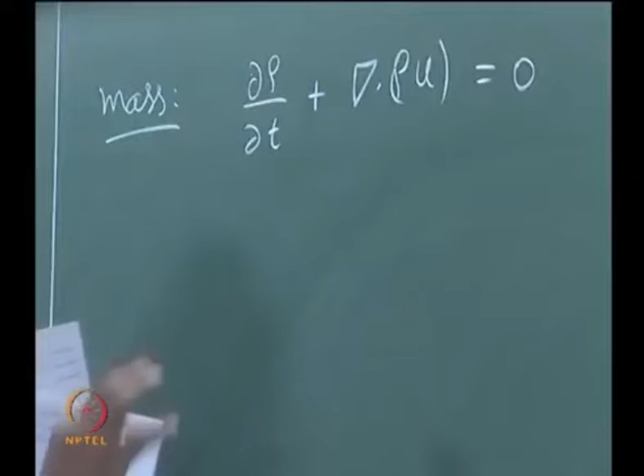This still remains the same, except I will write it in one more form, where this can be clubbed together as the total derivative. This is fluid mechanics, so I will avoid going into much detail of the total derivative. We will be using it in derivation because it makes our life simpler and decreases the number of terms we write.

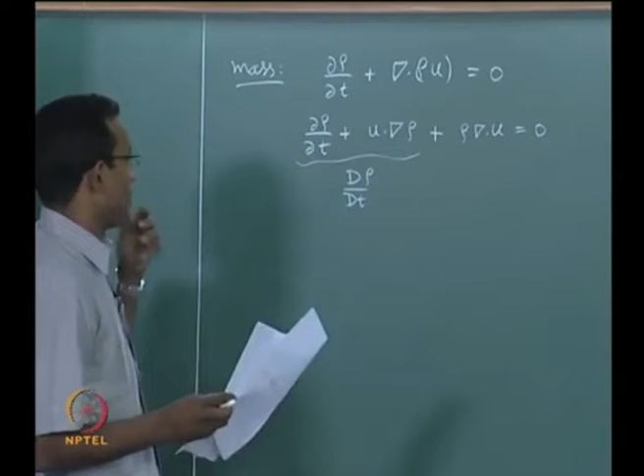So it can be written in this form also. If we say the flow is incompressible, meaning density does not change at all, this term goes to 0, and that is how we get to incompressible flow with divergence equal to 0. But we are not in the incompressible world, we are very much in the compressible world, so this need not be 0.

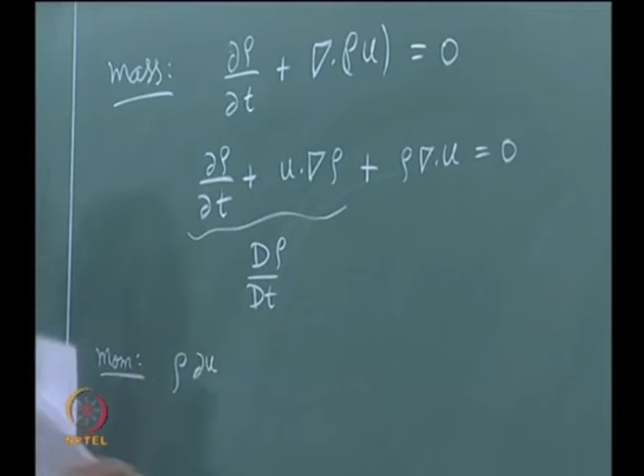Next is momentum conservation, where we got an expression. This is all referring to around the 5th or 6th lecture, somewhere at the beginning, where we derived all the equations of motion. I will put this arrow for vector u everywhere.

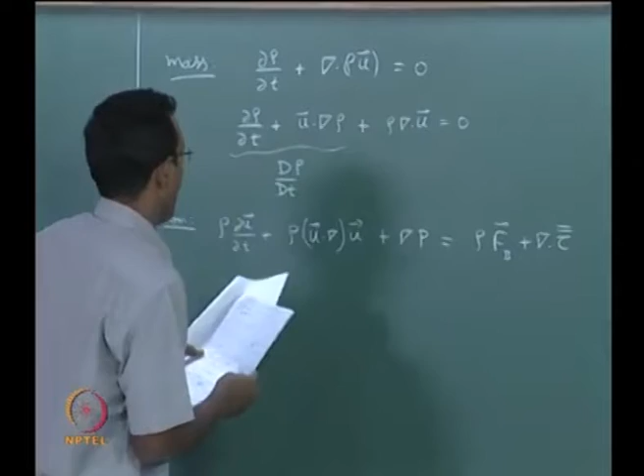I have written these extra terms now, which we said were 0 the previous time when we derived this. I have just added these two terms. This is telling you the total momentum conservation. The very first time we derived it, we had this term as d by dt of rho u inside the derivative, and I used this expression inside that to simplify it to this form. I will not go into details since it's fluid mechanics; when you derive the equation for the first time it comes out that way, so we will keep only this form.

Previously when deriving, we said we do not have any body forces, so we set this equal to 0, and we said we do not have any viscosity, so every term in the shear force, which has a mu inside it, was said to be 0, so we neglected this term. Now we do not want to neglect it, we will just keep it as is. So basically this becomes our momentum equation.

Next is energy. I will write what we had before, and then from there we will add two more terms similar to this.

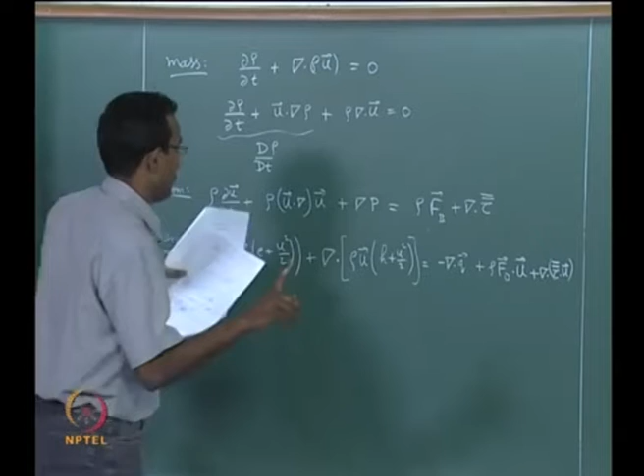One more thing I need to tell you is that FB is body force per unit mass, roughly an acceleration term. FB is body force per unit mass, but everything else is on a per unit volume basis, so I am multiplying by density to get to the per unit volume basis. That is how we got to this form.

Now I want to rearrange this energy equation so we can get more information out of it. What it is telling us is not very clear if I write it like this. This is perfectly correct, but it does not give full information. We will try and rearrange the terms here. I will take the left hand side of the equation and expand it, where I will say H is E plus P by rho, and see what I am getting.

I will do one more thing. I will use differentiation by parts so that I can cut down one step here. I am taking rho as one quantity and this bracket as another quantity, and taking the derivative by parts from here.

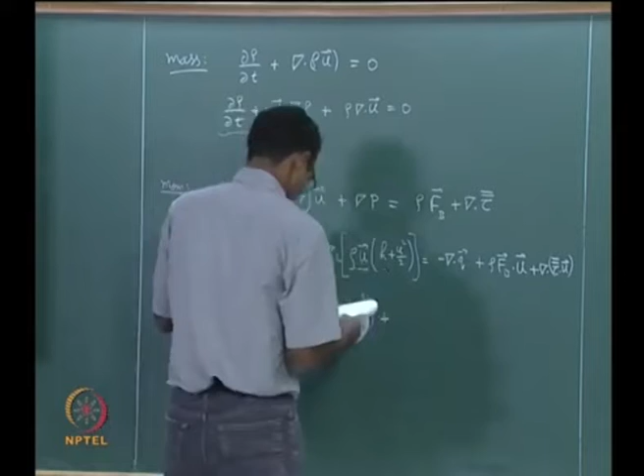This is coming from the first term alone plus the next term. Again we have to do a similar thing. I am going to group rho u together and keep the bracket as another term. If I keep the rho u term together, I am going to have...

Ideally I should have del dot of h plus u square by 2, which I want to write here as E plus P by rho. I will put h as E plus P by rho, take this E plus u square by 2 together and write it here. We will remember that there is one P by rho term left out inside this whole equation.

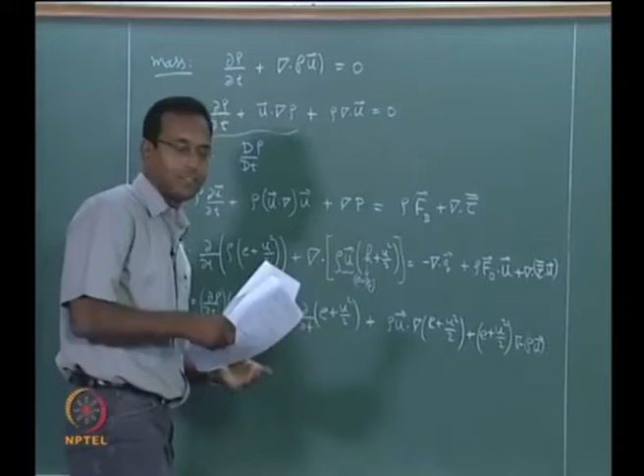This is one term plus the other term where derivative is on rho u, del dot of rho u. Now we will remember that there is a term del dot of rho u times P by rho which is left, which I will write separately, plus del dot of...

We will just keep it like this. I know I can cancel the density, we will do that later. Now I will look at this expression. I want to simplify it a little bit.

I will keep the terms with E plus u square by 2 as a common factor together. If I look at that, that will be this term and this term. If I take this common factor out, what is remaining is dou rho by dou t plus del dot of rho u, which happens to be equal to 0 from the mass equation.

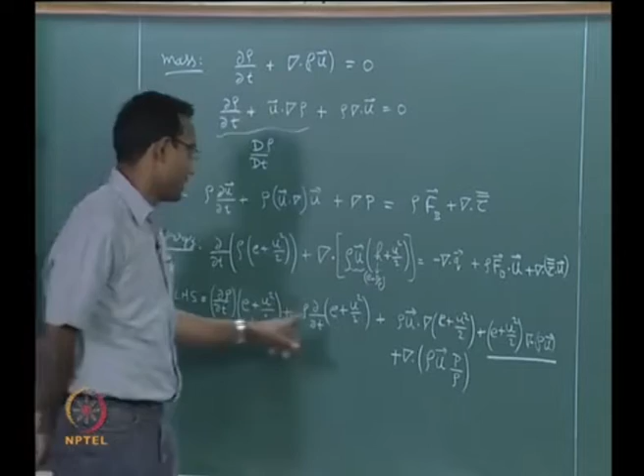So I will just remove those two terms from there. My left hand side is only these three terms. I will continue from there. By the way, that is the same exercise we did for getting the momentum equation from the previously derived form to the present form.

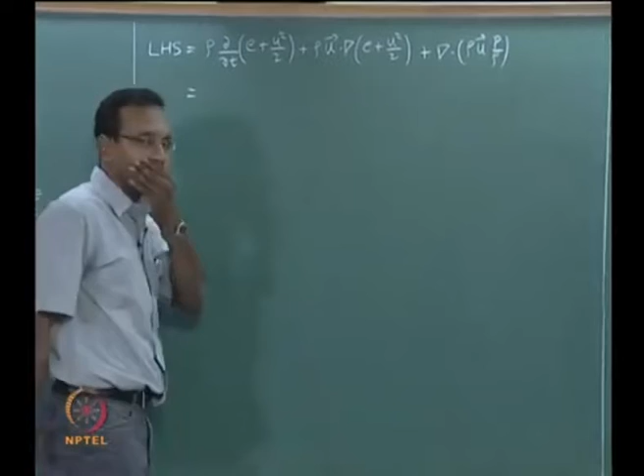Now I will rewrite this again. I want to get to a point where I will reach H naught, the stagnation enthalpy. So I will rearrange this now that it is in a better form, such that it will be H instead of E in both places, so I can write this whole thing as a total derivative. I will directly write it as H plus U square by 2. We will figure out what is missing after this.

Now we will put all the missing terms. I added a P by rho here, so that will come as the next term sitting there, minus rho into dou by dou t of p by rho. I will put a plus inside here, plus u dot del of p by rho, plus the final term there, del dot. Since I do not have space, I will cancel the density and write it there.

Okay, I have these terms here. Now I can club these two terms together and write it as rho into total derivative of H naught. These two terms come together to form this one term, minus the remaining terms.

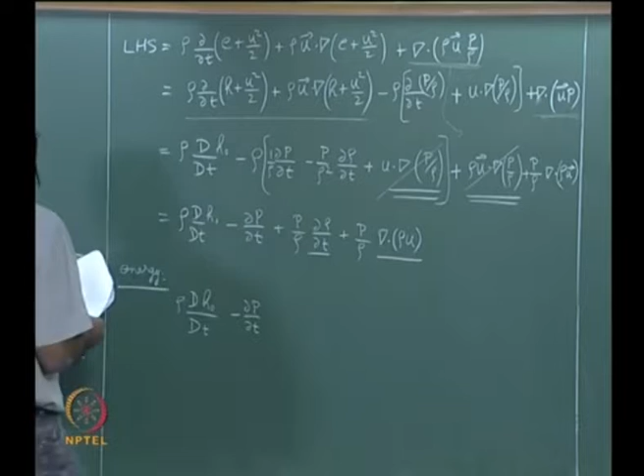Now I will bring all the other terms and write it together. My full energy equation will now be rho d H naught by dt. Now I want to write it with this on the other side, so I will put it as rho dH naught by dt, I have taken the dou p by dou t to the other side, and I have the remaining terms.

I will write it as plus rho fb vector dotted with u, plus del dot of tau tensor dotted with u vector. There is one more term, minus del dot of q.

Okay, I finally have this particular form. We won't do any more changes to this. This gives you some more physical feeling. All this time we said total enthalpy is the net energy content of the fluid. This includes kinetic energy as well as internal energy, thermal energy including the pressure energy. It is having all forms of energy, thermal energy, pressure energy and kinetic energy. Complete set is inside this. So this is the net content of energy in that particular fluid element.

Now we want to see the change in that particular quantity. If I look at it, it may change, the simplest term is this one: if I call del dot q the divergence of heat, this is heat conduction, heat flux q is basically talking about divergence of heat away from this point. So if there is divergence of heat away from this point, that is going to have energy loss, so it is negative. Or you can think about minus of divergence as the convergence of heat, opposite of divergence, converging heat into that point, that is increasing energy, whichever way you think about it. That is one term.

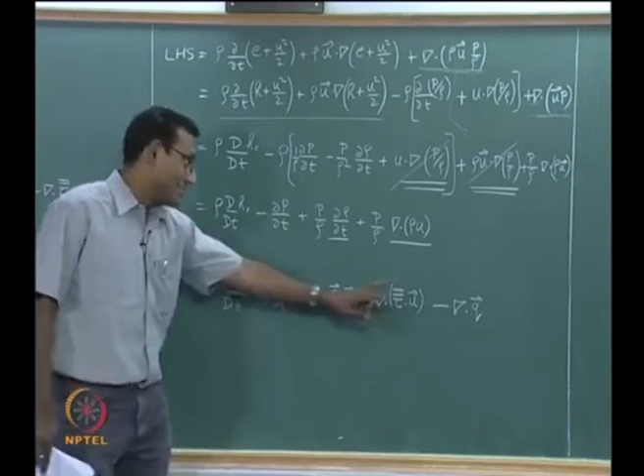And finally, there is one more term here which is talking about if I suddenly have an unsteady pressure rise, that can also add energy to my fluid. Where have we seen this? We have seen one example where we said there is no heat transfer, no body force, no shear, but we have a moving shock. When the shock crosses my current point of interest, I am going to have pressure rising. When the pressure rises, I am going to have T naught increasing, that is how it was, right. We found that when a moving shock crosses my point, T naught increases, that is directly coming from here.

These are the various mechanisms by which we may change energy of the fluid. Till now we have thought about only simple things; now we will go and look at a little more details of what all other things can change the net energy.

Of course, we will still neglect this body force term - you can add it, it is simple enough. We are going to think about heat transfer and viscous forces, but we will not deal with this complicated viscous force term. I will not explain what this tau tensor is really, I am just going around it since it is not important for this course, because we are going to work in one dimension, where it comes out much simpler. If I send an expansion wave, what happens?

This will automatically become negative, pressure is going to drop, and that will automatically pull out energy from the system. That can also happen. If there is a moving expansion, it is going to cool down the gas, it is going to pull out net energy from the gas also. Any of these can be happening in there.

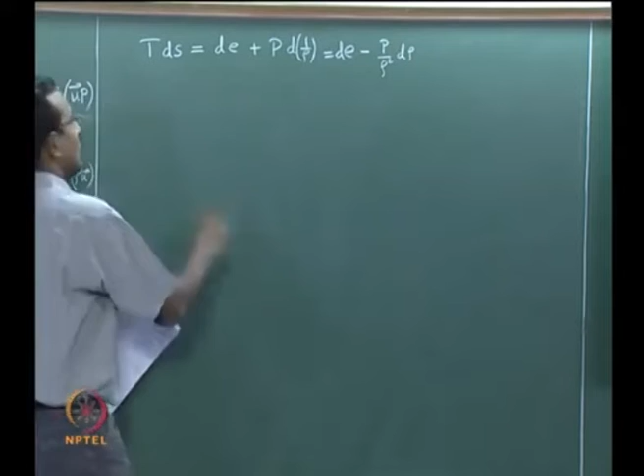Now, we will use this particular definition and we want to write ds by dt, the total derivative of entropy, the net entropy change in my fluid element. If I write that using this derivative notation, I can immediately jump to this derivative: dE by dt minus p by rho square, d rho by dt.

Now, I look at this minus d rho by dt. I will use my continuity equation which is out here - this is why I wrote d rho by dt. If I put a minus sign, it is equivalent to taking this part to the other side of the equation, so it comes out to be rho times del dot u. I will use that in there, so I simplify this to dE by dt plus p by rho square into rho del dot u. One rho gets cancelled there. I have this particular form here.

Now, I need to write dE by dt, which is just talking about the internal energy of the fluid, not the total enthalpy which is what we have been writing till now. So now I need to split this total enthalpy from my full energy equation. For this, I have to think about what are the components of my energy equation. I have my enthalpy plus kinetic energy as my total energy equation, where enthalpy is internal energy plus p by rho.

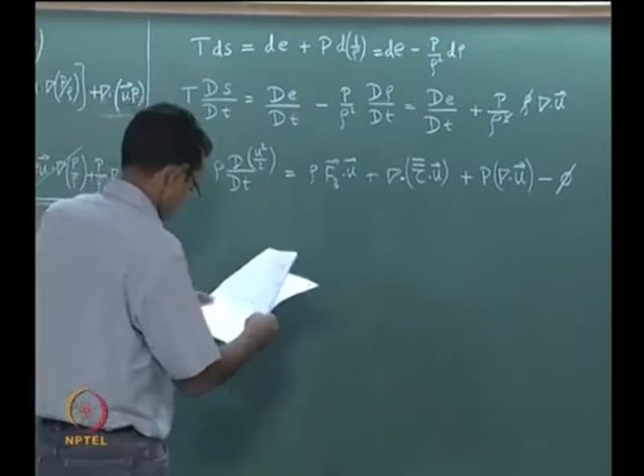So if I subtract this from our original energy equation which we had before, it comes to a point where I can write rho dE by dt is equal to minus del dot q minus p times del dot u plus phi. Only these will be remaining. You will find that the viscous work is going to be internal and it will just sit in the total energy also. So only thing remaining is this particular part.

What we are now seeing is this is only the thermal part of the energy. When we look at the thermal part, we find that if there is net convergence of heat into the fluid element, then it increases. If there is net contraction of the fluid element, del dot U is related to the rate of expansion of the fluid element, and minus of that is like compression of the fluid element, that is external work done on the fluid that can cause heating, and this is the energy added from kinetic energy to thermal energy due to viscous effects.

If you look at this previous equation and this equation, in the kinetic energy equation there is a minus phi, I did not write the term, but it is going to be negative, pulling out energy from kinetic energy, and here it is plus phi, adding that energy into the thermal energy.

If you look at the total energy equation which we had before, I will go back to it once more, that is this one, we find that there is no phi in this particular thing. Why? It is just an internal rearrangement, taking from one pocket and putting it into the other, so it is not there at all. This is the net energy, overall how much do I contain, that kind of thing is this one.

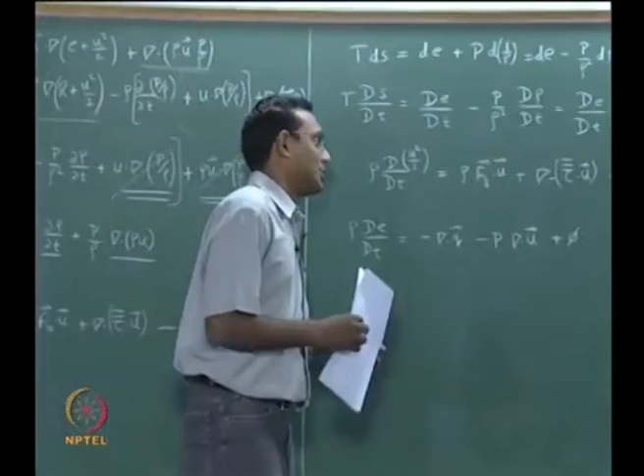So this is my internal energy equation. Now I want to put this dE by dt inside here, and I have a rho here, we will multiply this entropy equation with rho, so that I will get rho dE by dt. So I am going to finally have a form: rho into temperature ds by dt is equal to, I will put rho into dE by dt, instead of that I will write this expression which will be minus del dot q minus p into del dot u plus phi. I have this particular term, now I will write this particular thing, p by rho times del dot u.

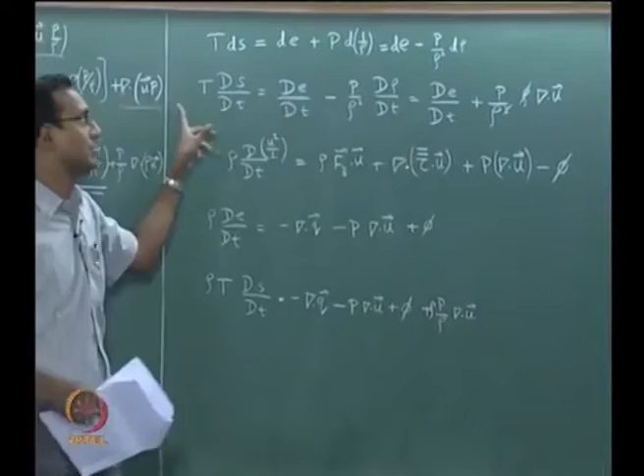This is my net entropy equation. What is that? Oh, the last term should have a multiplied by rho also, because I multiplied the whole expression with rho. While rho dE by dt was this term, that one should also be multiplied by rho, so the p and rho will get cancelled. So I have this term. Now you will find that this term and this term get cancelled.

So, I am finding that for my entropy to increase, it has to be through convergence of heat into the fluid element or through frictional heating of the fluid element. These are the two modes where I can have entropy increase in my fluid flow.

Up to this point I have always used compressible flow, density was changing. It so happens that I used my continuity equation, so the density always comes out of my derivatives, but I know that it is compressible flow.

So the essential part of this statement is that if I do not have heating of my fluid, either by heat conduction or by viscous forces, I will not have any entropy change in my fluid flow. These are my predominant changes in entropy. Entropy changes are mainly due to this.

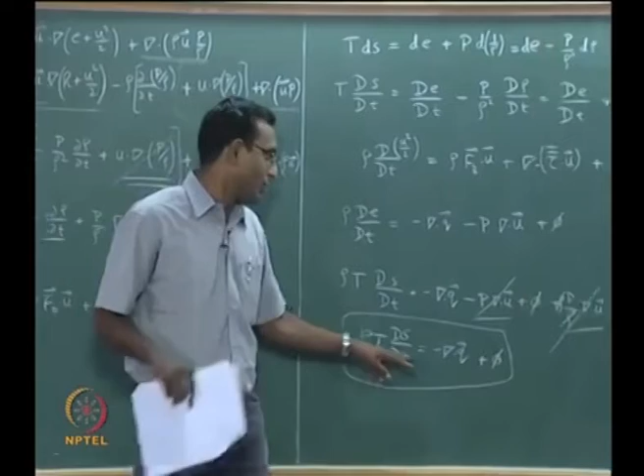Of course, we also know there is one more way we can change entropy, that is through shocks in the flow, which is just sitting inside this, which we could not talk about here. That will come as delta P naught, that will not be from here, that should come from the direct expansion of this term.

If I expand it, we did this long back, I don't know where I have that expression right now, but we found that delta S by R was equal to log of T naught 2 by T naught 1 to the power gamma by gamma minus 1, multiplied by P naught 1 by P naught 2. We had one such expression.

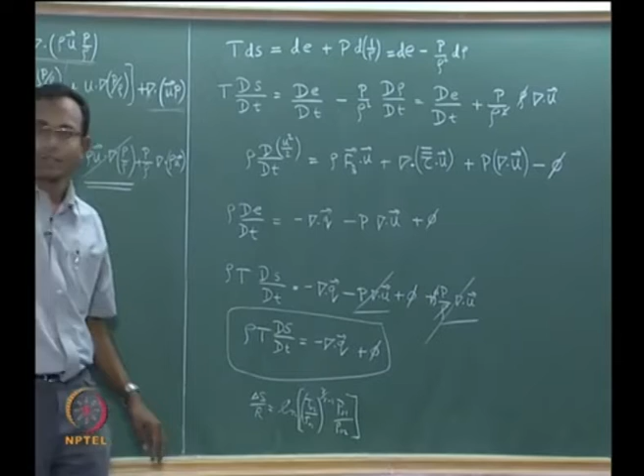This is going to take care of that fluid mechanical way of increasing entropy. This is one more form of writing it, actually derived from the top equation. We won't go into the details of that right now, it was done, I believe, just after the moving shocks discussion.

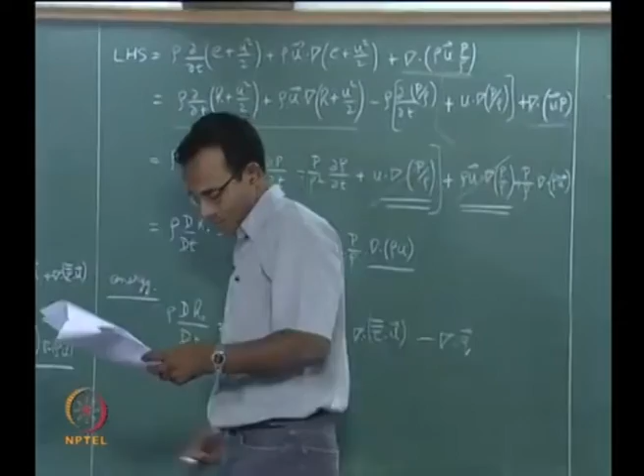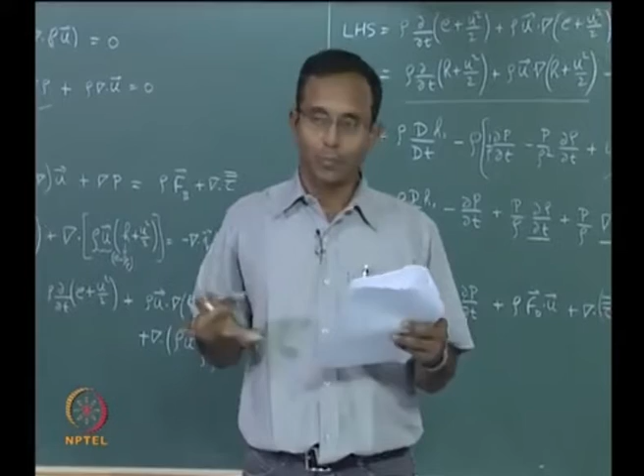So we want to look at those two particular characteristics, that is, heating of the fluid element or viscous forces causing entropy change. We are going to deal with two types of flow fields now where entropy change is important. First one we will pick up friction flow, next one we will pick heating.

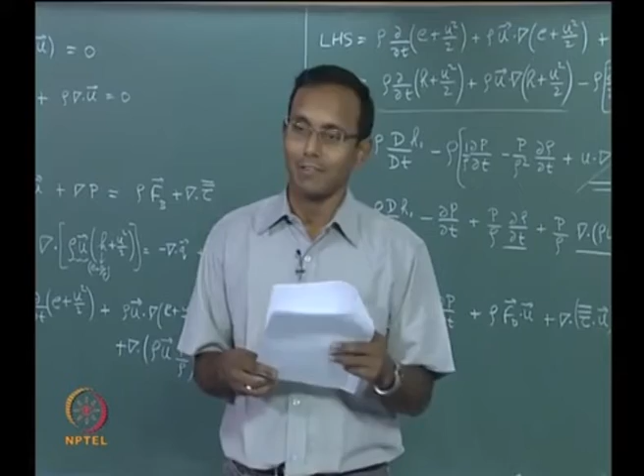But before that, I just wanted to give this small snippet of analytical work by an Italian engineer called Crocco. It is a nice point to give it here. It has to be given so that you will understand the connection between vorticity and entropy. Since we are anyway deriving gradients of entropy in my flow, it is a good point to give it at this point.

We will derive it the simplest way first, then we will give you the most complicated expression, that is the final result. It is also going to introduce you to the streamwise coordinate system.

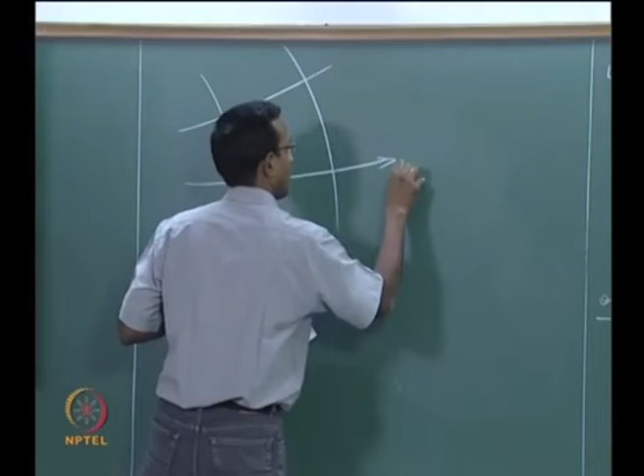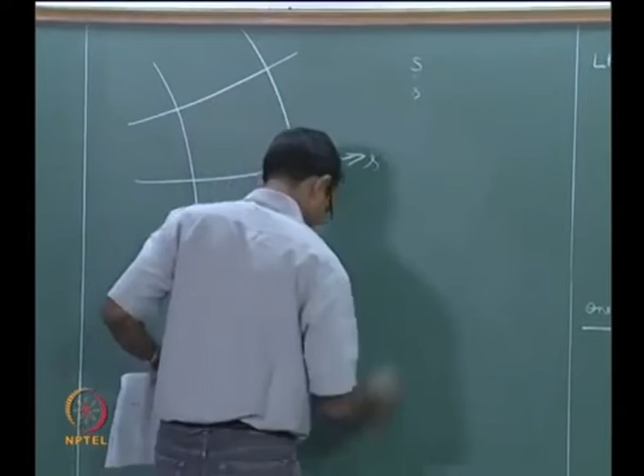I am calling this my streamline. I am using this kind of S, small s, while if I use the other S, this is entropy per mass. This is my streamwise distance coordinate system. So I am having this as S, let us say this is my reference point I am picking, this is my n, the normal, stream normal coordinate system.

So I will say that if this is my point n comma s, there is going to be a delta n there. This point will be n, s plus delta s. While here it will be n plus delta n, this will be n plus delta n, s plus delta s, that kind of coordinate system I am going to have.

Now let us say I have some particular velocity direction with respect to my previous original rectilinear coordinate system. Let us say this is having a theta with respect to xy coordinate system, that is my velocity vector.

If that is the case, then when I go from here to the next n point, the velocity vector will be parallel to that local streamline, which is this line, another S curve, and that angle is going to be theta plus dou theta by dou n times delta n, just a generalized form of writing it. For a small change in n, how much will be the change in theta is what this represents, and we will just keep it that way, very generalized form.

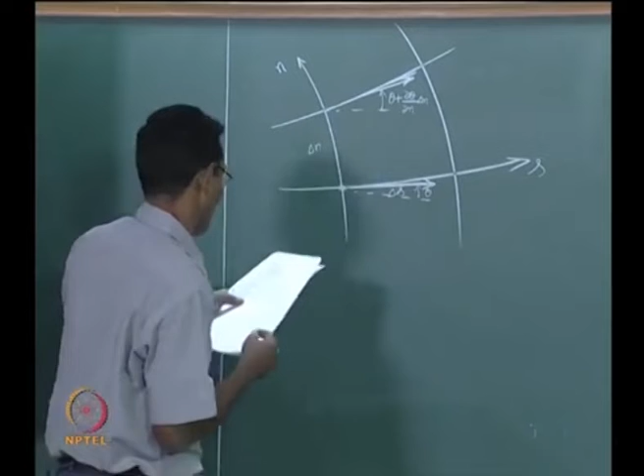And here this gap was delta s, I am going to say this is delta s plus dou by dou n of delta s times delta n.

Okay, the change in delta s with delta n is what is shown there, that is this point to this point, the gap is there. Just taking care of full details. Of course, we may not use all of them, and what will happen to velocity here, this velocity will be u, which is the value here, this is my velocity u.

It will become u plus dou u by dou n times delta n. This will be the velocity at this point.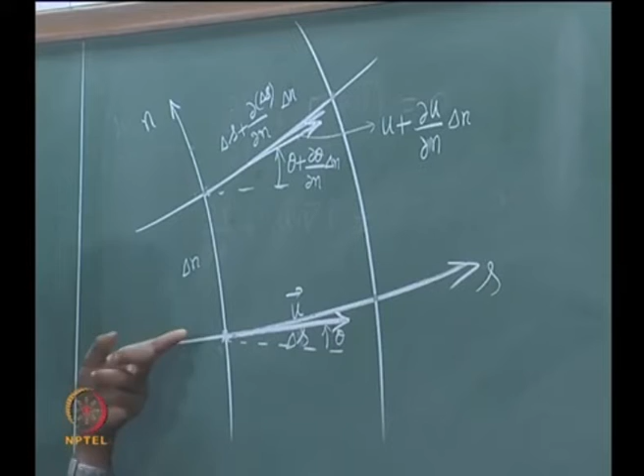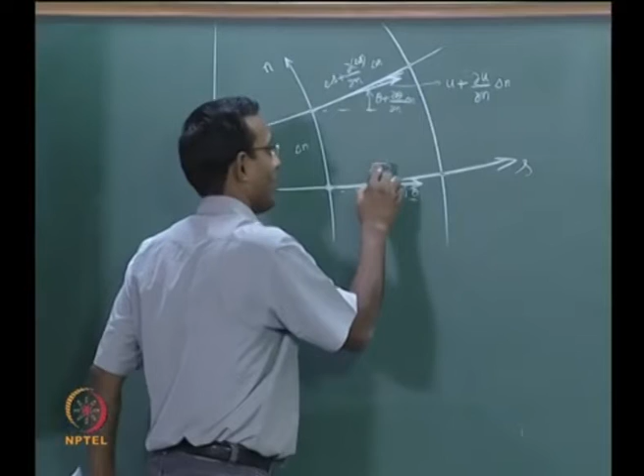Should I think about components of velocity? There is no components here because it is a streamwise coordinate system, which means all the velocity is going to be only along this S. There is no velocity component perpendicular to it because this is a streamline. So I can just talk about velocity always along this direction, there is no perpendicular component. So I have basically brought my problem down. I don't need to think about u as a vector, I will just think about u, and it looks as if it is a 1D problem finally.

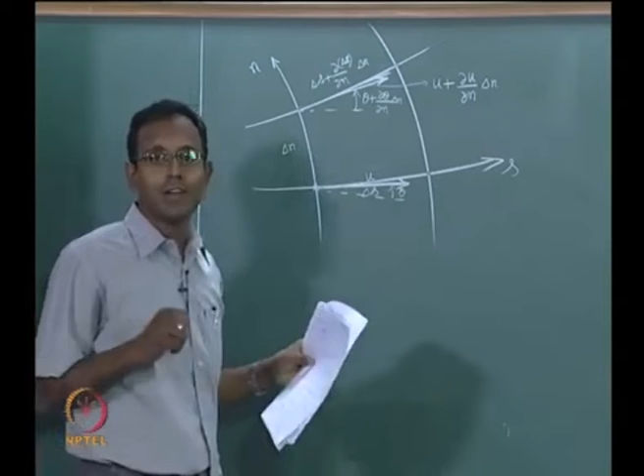Because it is going to be varying only inside the stream tube. Between any S and S plus delta S, n and n plus delta n, that particular thing is one set of stream tube, and my problem is 1D problem inside this, which means now I can use all the 1D equations. So we will write the 1D conservation equation for this.

Whatever we have used all the time, we will just write it here: rho u times delta n. This is supposed to be rho u A is constant. When I say delta n here, this delta n is this length and unit depth inside. I am thinking 2D problem, it is unit depth inside. So delta n times 1 is what is given as area here.

Similarly, momentum, now we have to be a little more careful, forces can act along this n direction also. So now I have to think about S momentum first, only along the S direction, S momentum equation, like we had x momentum and y momentum. So here it is S momentum equation.

Now it can be written as rho u dou u by dou S equal to minus dou p by dou S. If you look at this, this is your acceleration of your fluid element, inertial forces here, and that has to be compensated by the pressure force from here to here. The fluid is accelerating this way because I am going to say pressure here is higher than pressure here, so there is a dp by ds that is negative, and the net force acting will be minus of dp by ds times that area. I have divided by area throughout, that is this.

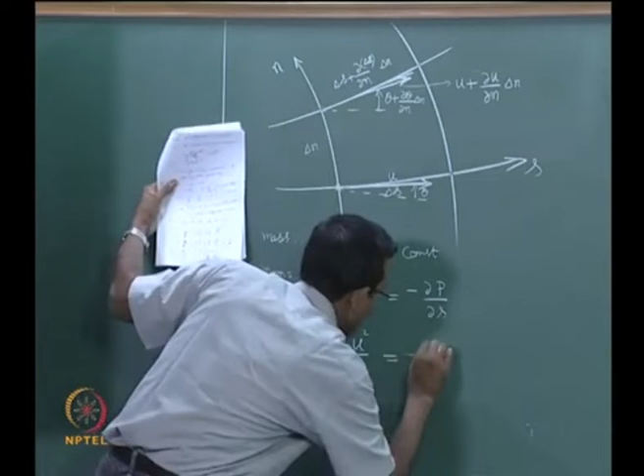So I will write an expression for that, that will be rho u square by r, this is your centripetal component, this should be given by minus of dou p by dou n. The normal force, if my pressure here is higher than pressure here, then my streamline will curve up. As the pressure goes from lower end to higher end, pressure decreases, which means my streamline will turn up, that is what this is showing here. Minus of dou p by dou n is the net force upward, that is going to cause a centripetal acceleration, that is this term sitting here.

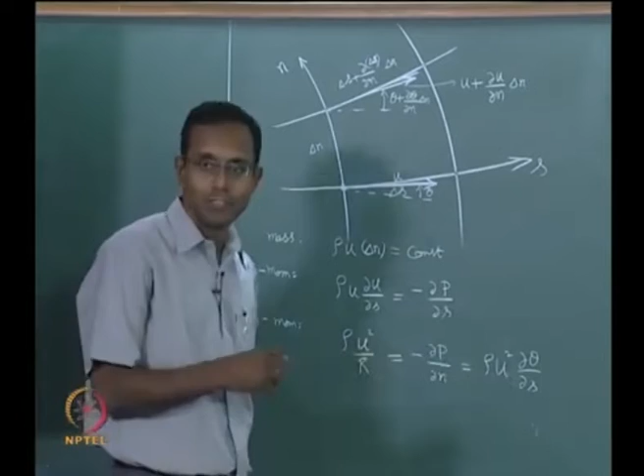Now I will just write, since we have this u square by r, r is your radius of curvature, I will write this in terms of theta, which we are given in the drawing. Rho u square into 1 by r can be represented as dou theta by dou s, that happens to be the curvature. 1 by r is given as curvature, which is equal to dou theta by dou s. How does theta vary as I go this way? That talks about the curvature of this particular curve S coordinate system.

Now the only other thing left is energy.

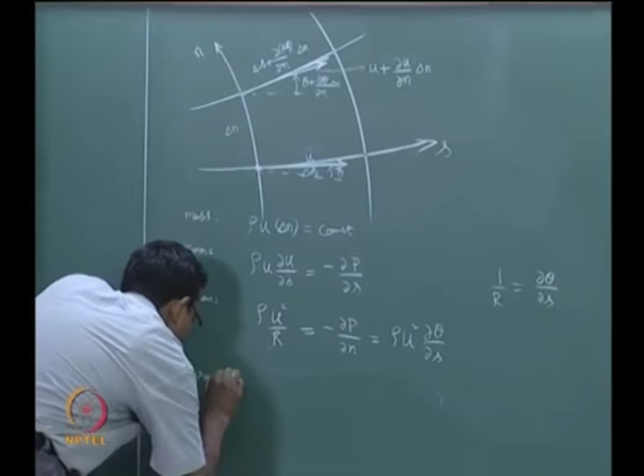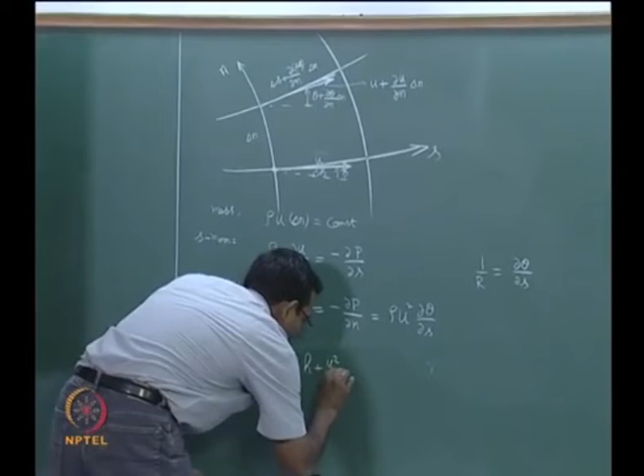We will write the simplified form where we say there is no heat transfer and no viscosity, just for this Crocco's theorem derivation alone. When we say that, we know H naught is constant. This is the old 1D derivation, I am just writing it again. In fact, in today's derivation also, when you set those terms equal to 0, you automatically get to this. I can introduce a non-stationary flow where pressure may change with time, getting a dou p by dou t term, but currently we will keep it simplified. When we give the generalized expression, I will give the full thing.

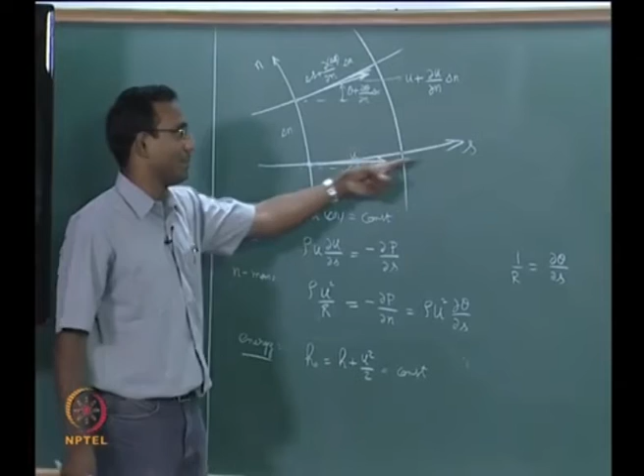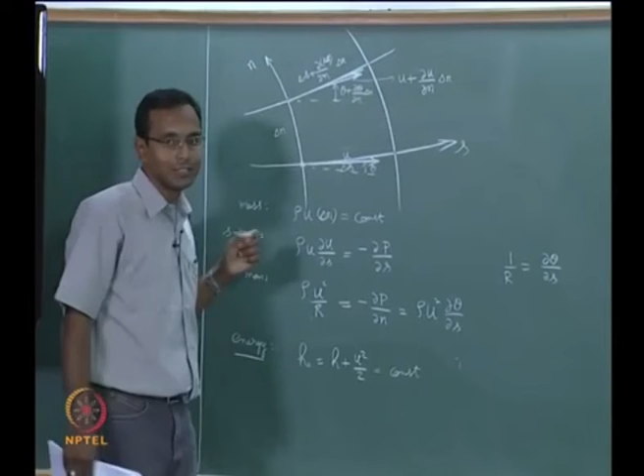One more thing: this tells us H naught is constant for every streamline S. It may so happen that this streamline has a different H naught from another streamline. I did not say H naught is constant for all S, only that it is constant along a particular S. In 1D gas dynamics, we just know that inside a stream tube H naught does not change, but it may change from one stream tube to the next.

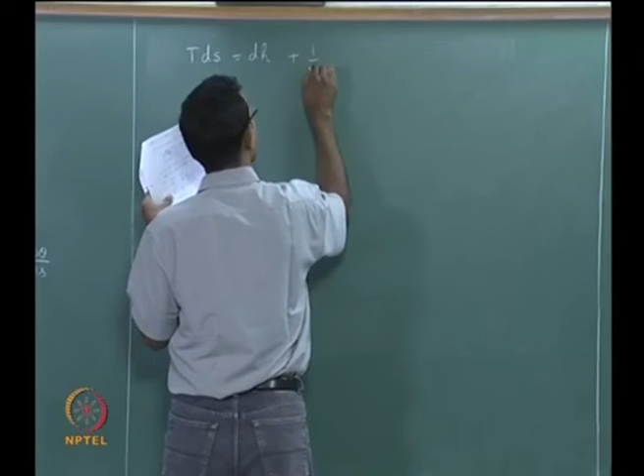So now I will write again the entropy relation, where S is entropy per unit mass. dH minus VdP, which can be expressed in terms of dH naught from the expression written there: dH naught minus U du will be your dH minus 1 by rho dP. I can write it like this.

From here I want to look at the individual variation of entropy along the S direction and N direction. This definition is for any particular change in S. Now I will make it change only in one particular direction: T dou S by dou s, the streamwise coordinate, is equal to dou H naught by dou S, which is 0 because that is constant, minus U dou U by dou S, minus 1 by rho dou P by dou S. This is what we get.

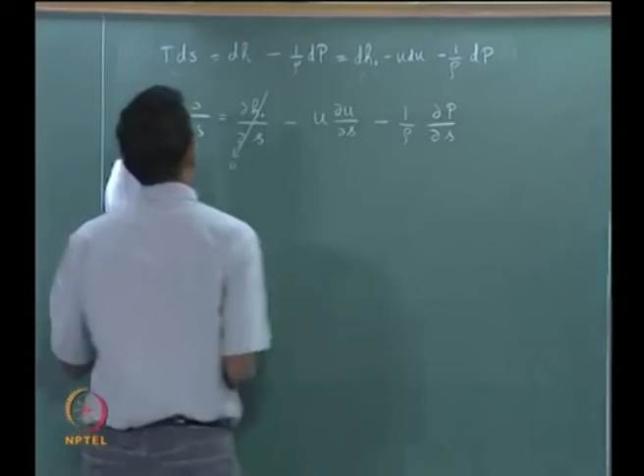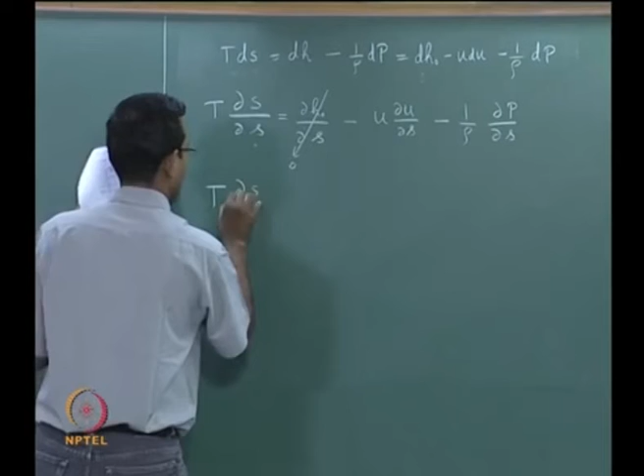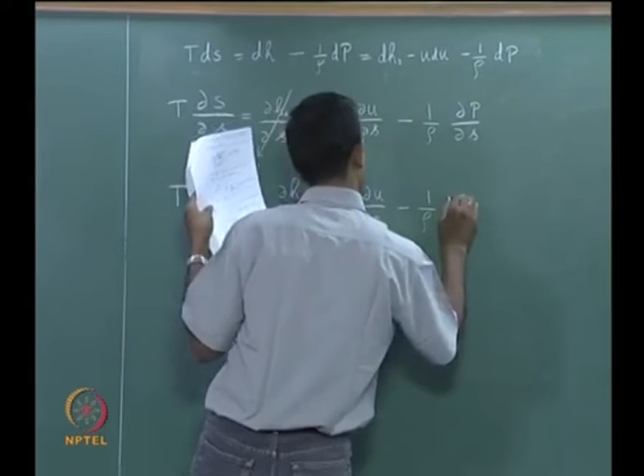And now I will write the other one, the stream normal direction: dou S by dou N is going to be equal to dou H naught by dou N minus U dou U by dou N minus 1 by rho dou P by dou N. I have these, now we go back to dou S by dou S.

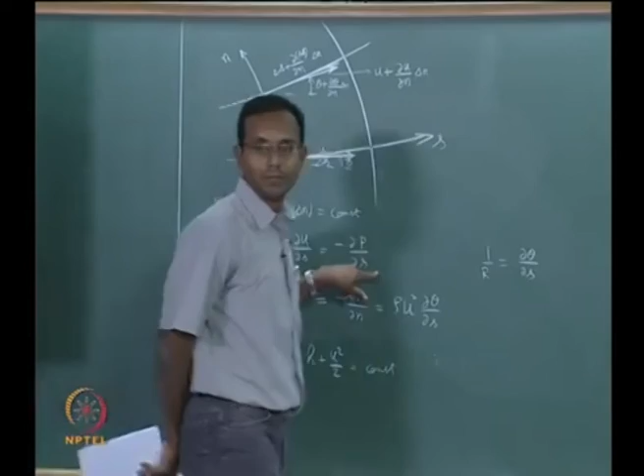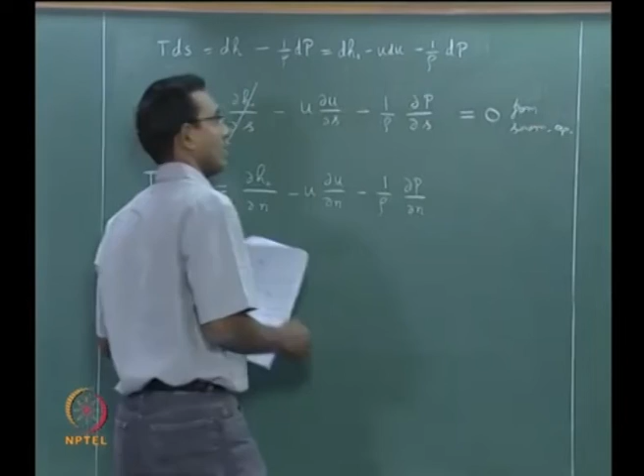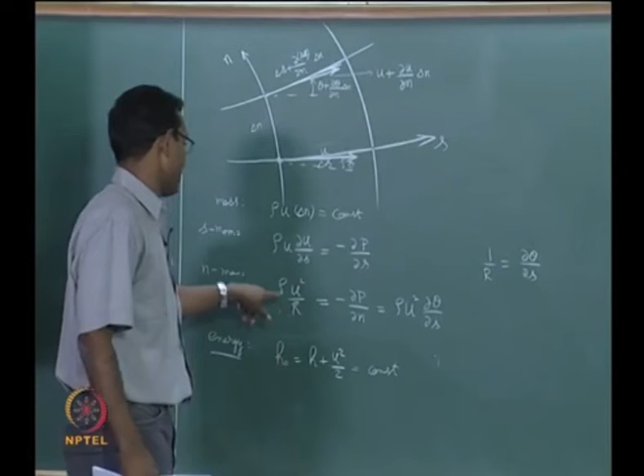Now we look at dou S by dou S. From my S momentum equation, this is going to become 0 -- if I take 1 by rho here, this is equal to that other term, and one is negative of the other, so these two give out to be equal to 0 from the S momentum equation. That cannot be said about the other term. If you look at it, I can write something for dou P by dou N, that will be rho U square by R, and even if I write it, that is not going to be 0, that term will just stay.

So this is going to be equal to dou H naught by dou N minus U dou U by dou N plus U square by R. Just have this particular form.

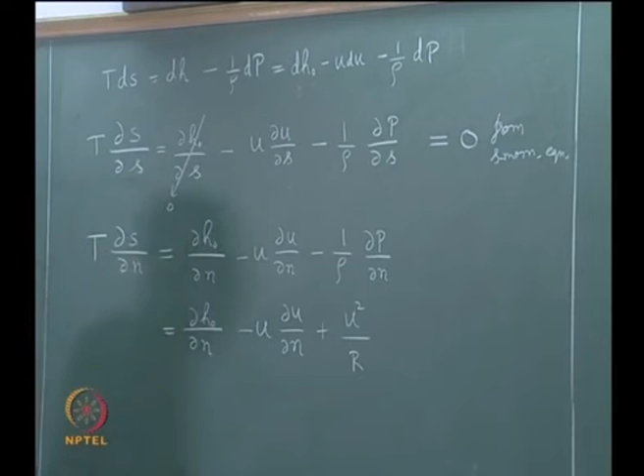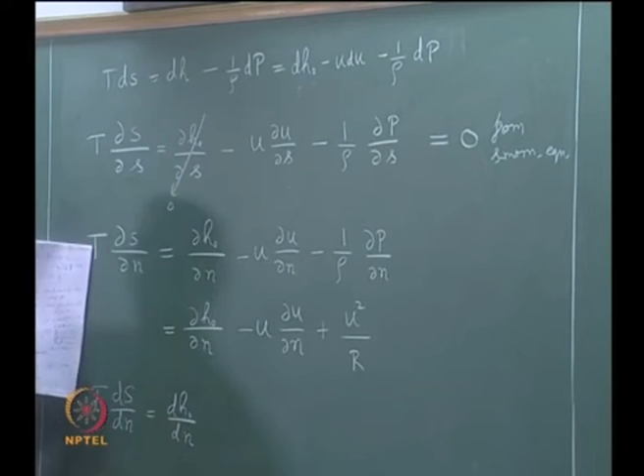Now since dou S by dou S is 0, and S can vary only along S or N -- entropy can vary only along streamwise or stream normal direction -- and we say it does not vary along the streamwise direction, I can rewrite this partial derivative as a total derivative. The same can be done for H naught, which can also be written as a total derivative. If I do that, T d S by d N is equal to dH naught by dN plus U into U by R minus dou U by dou N.

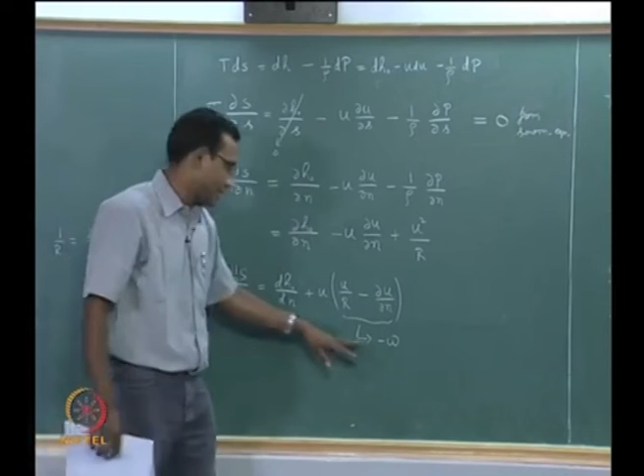I will just say here that this term can be shown to be equal to minus of omega, the vorticity vector. This is actually a vector, but since it is a 2D problem, the vector is always going to be pointing out of the board, and it is going to be having a negative value because in this case it will be pointing inside the board. So I will just keep it as is. This is from the definition of vorticity in streamwise stream normal coordinate system. You will get it to be this. We will just write it like this.

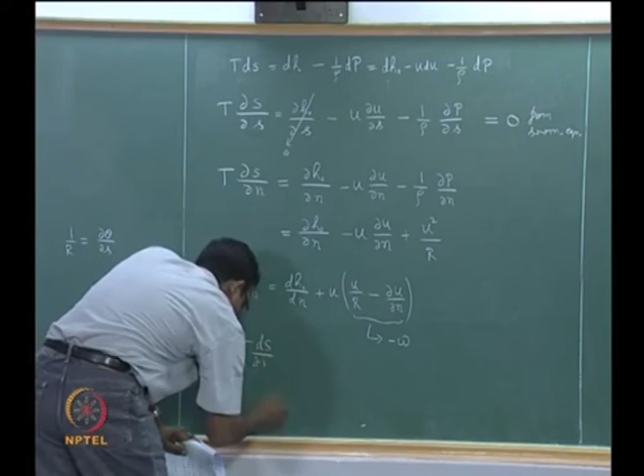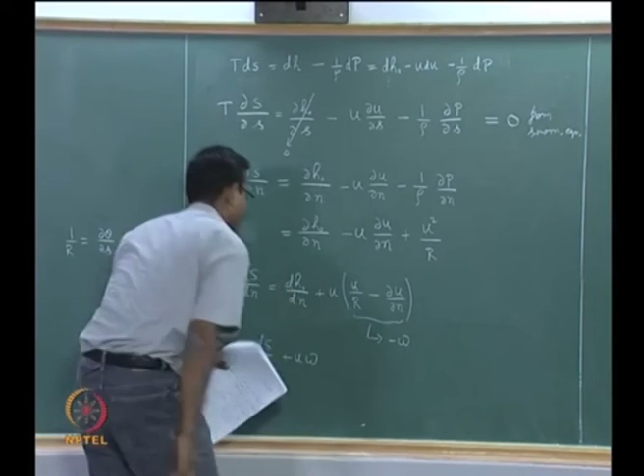So I finally end up with a form. Let me check whether I made a mistake somewhere here. Minus will become plus on this side. I am not sure of this, whether it is plus or minus. As of now I will assume this plus, it could be minus. Just a minute, we will just go through this. T ds by dn, I will just keep it as minus there, so it will become plus u omega is equal to dh naught by dn.

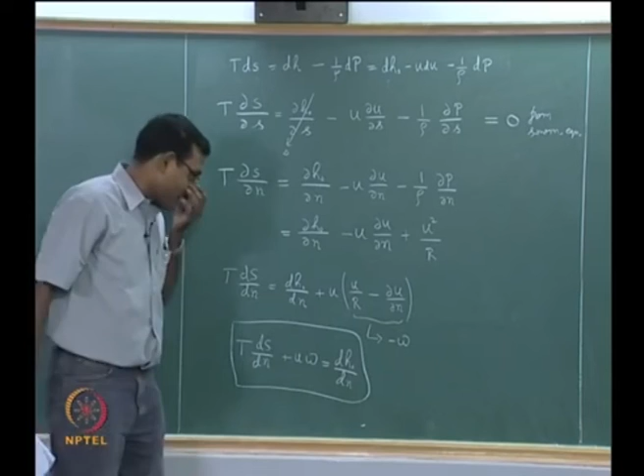We get to this expression. It looks like I have made one small mistake in my derivation, but I am not sure. I believe this should be minus omega here, but the expression seems to be correct finally. So maybe I have made a mistake here or not, I am not sure whether it is minus or plus. But this is the final expression I am getting here, and the physics I want to talk about will not change. There might be a minus or a plus currently, we will just leave it there.

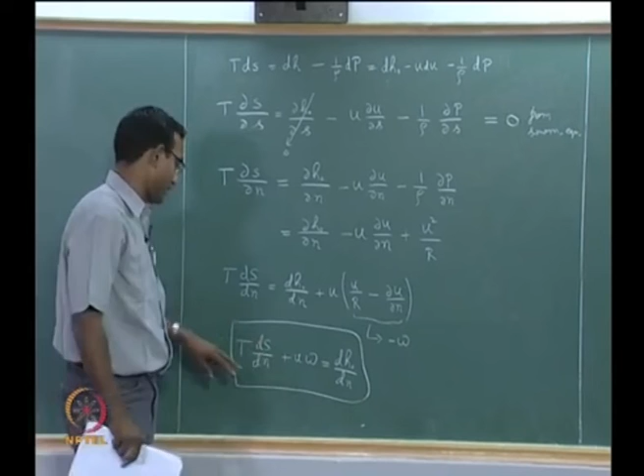Physics I want to talk about is: if I have enthalpy gradients in my flow from one streamline to other, that is in the stream normal direction, then I may have entropy variation. That is one way of looking at it. Or if I am starting with constant enthalpy in all the streamlines, then if I have entropy gradient, I will definitely produce vorticity in my flow. This is the important statement of Crocco's theorem, called Crocco's theorem.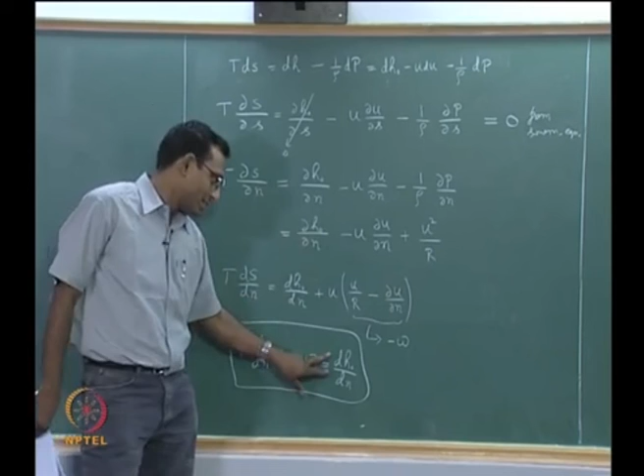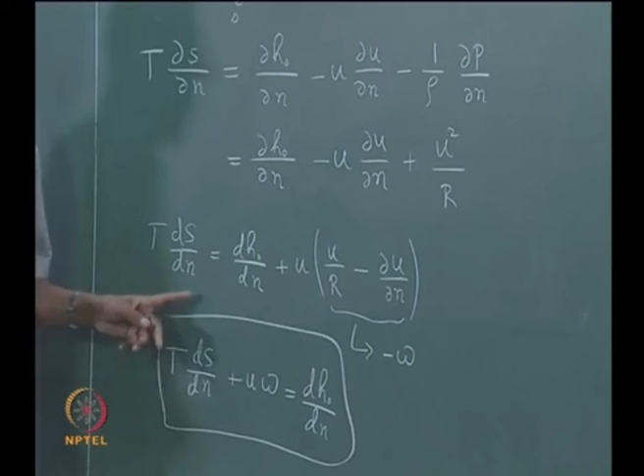Typically, most of the fluid flows which we start or work with will always have dh naught by dn equal to 0, and we also have dh naught by ds equal to 0, that is, h naught does not change along the flow streamline. So since we started with enthalpy constant at the beginning, it remains the same all through, except if there is entropy gradient across streamlines, d by dn of s not equal to 0. If I have this not equal to 0, then I will definitely produce vorticity. This is the main statement of Crocco's theorem.

Now I will just write the full, more complicated expression for Crocco's theorem, then we will stop here. We will look at the implications of this next class.

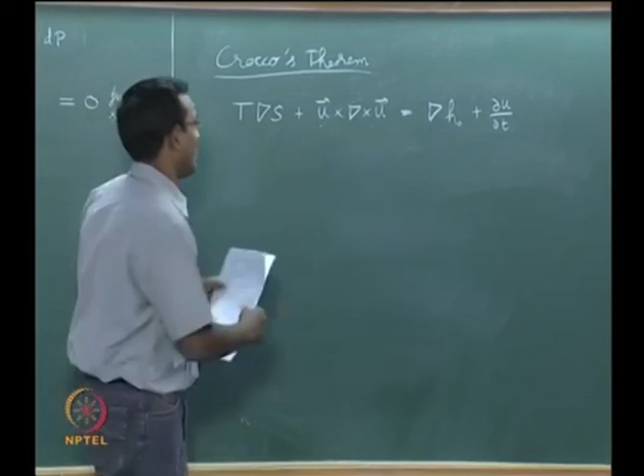The full equation of Crocco's theorem is: T times gradient of S plus u cross del cross u is equal to gradient in H naught plus dou u by dou t. This is the full Crocco's theorem expression, where what we derived did not have any non-stationary term, we removed that part. This is the most complicated form, where this is your vorticity omega vector in this case, we have this particular term.

What we are seeing again is, if I start with isoenthalpic flow, or homenthalpic flow if you are referring to some other books, and I am having stationary flow, then I do not have these two terms, that is zero. Then if there is an entropy gradient in my flow, I will produce vorticity in the flow. This is the main statement from Crocco's theorem.

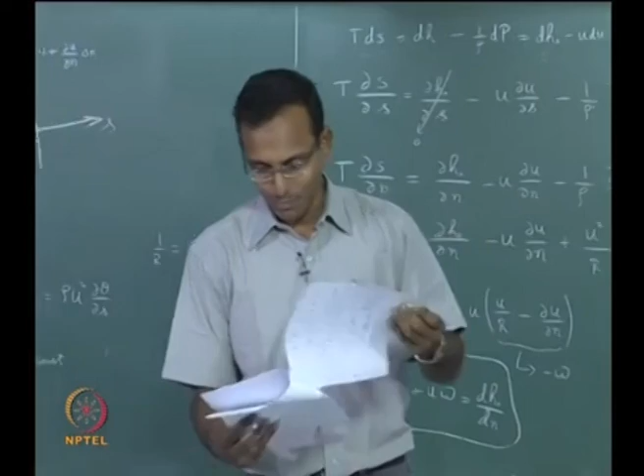We will look at examples of vorticity produced in the flow next class, and then start going into frictional flows and how to analyze flow with friction. This one small part I wanted to discuss also by today, but there is not enough time, I do not want to hurry, we will do it next time.